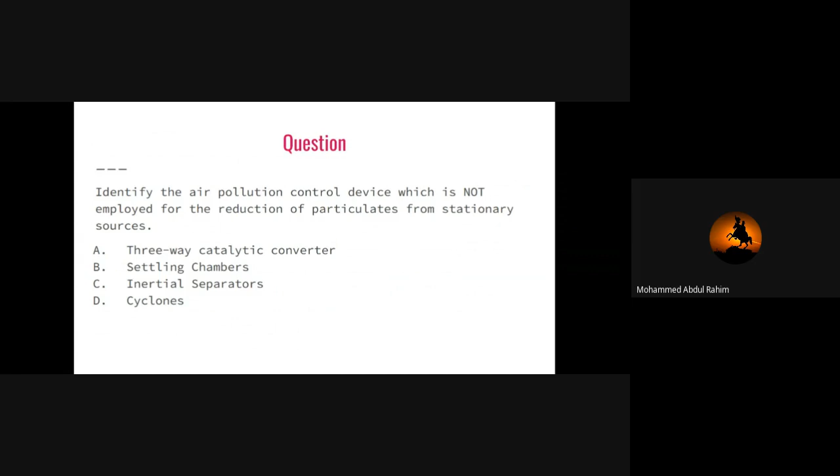Okay, actually the answer is three-way catalytic converter. We will talk about this, how this is the three-way catalytic converter. Actually, the settling chamber is a kind of chamber in which the gas with the particulate matter will come in and will go out. And while that gas will go out, it will be cleaner in nature. So this is for the reduction of particulate matter from stationary source.

Then the inertial separator. This is again like that. We have some fibers, for example, and we have some obstacle. And when the gas will come, this gas will strike the obstacle. The gas will change the direction, but the particulate matter can't. Because of that, particulate matter will settle down. Then the cyclone, we will talk about the cyclone as well. These three are the devices by which we can reduce the particulate matter from the stationary sources.

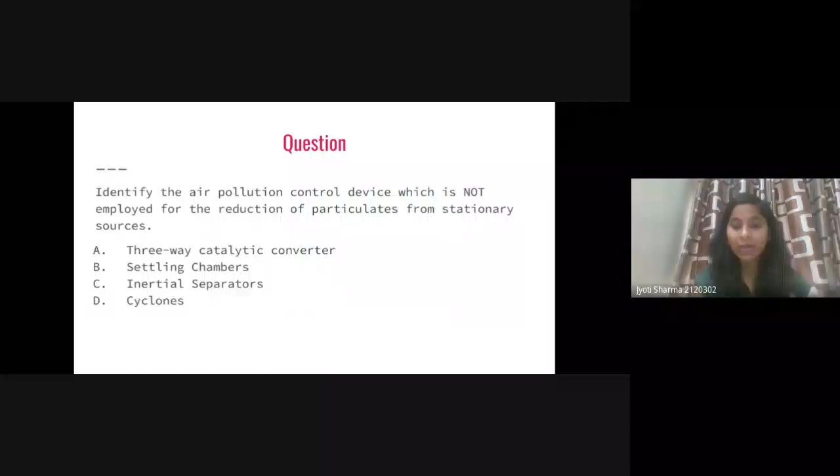Okay, so the three-way catalytic converter is not for the stationary source but for the mobile source. For example, for the vehicles, but the rest three are for the stationary source. So Nishant gave me the right answer, and this should be A.

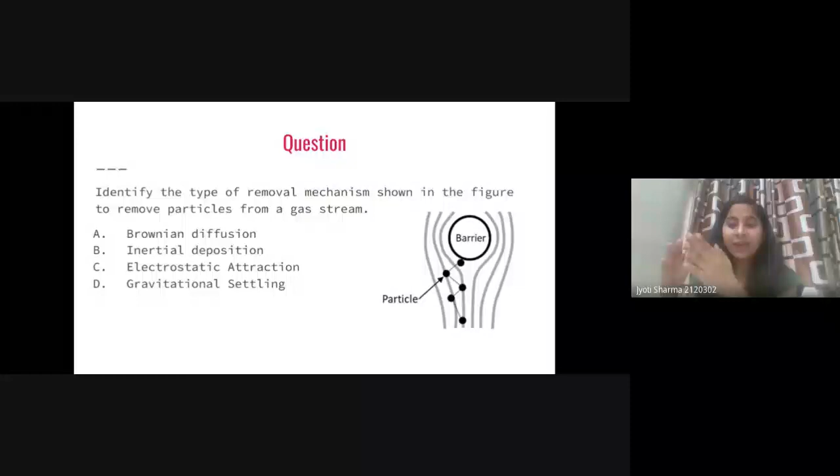The second thing is, the movement of the particle is always a zigzag movement, and this zigzag movement is nothing but Brownian diffusion. And this is also the mechanism that we exploit to control the particulate matter from our gases. So this is the Brownian diffusion.

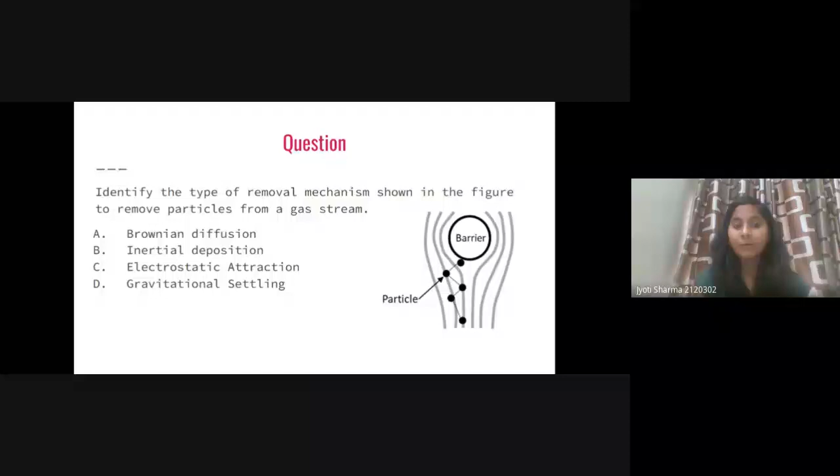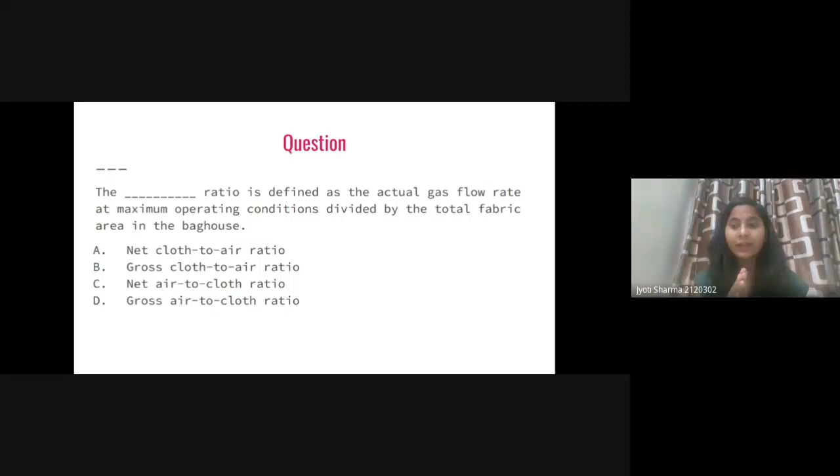So, this is the example of the fabric filter that we use to control the particulate matter. For example, you have some fabric, and this fabric is just to control the particulate matter. Whenever you have only one unit of that fabric, this will be the gross air to cloth ratio. But when you have multiple units of this fabric filter, and maybe some are in use and some are not, then this will be the net air to cloth ratio.

It is very important to calculate how much flow rate you are having and how much surface area of your cloth will be used as a filter. So of course the answer should be D only, that is gross air to cloth ratio.

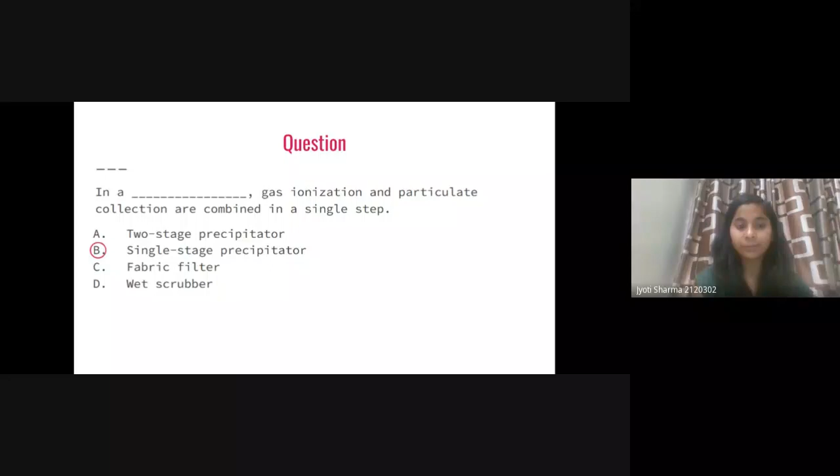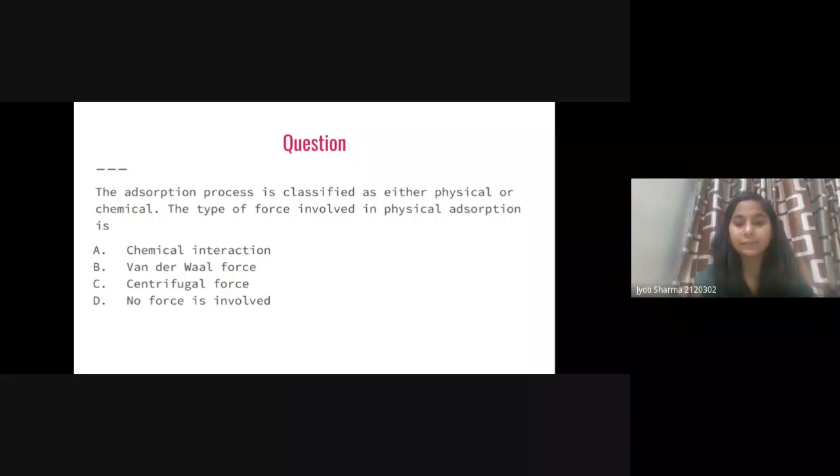But in the physical process, there is some kind of electrostatic force, and this is very mild in nature. It is very weak, and because of that electrostatic force, your particulate matter or gas can attach to the surface. The weak electrostatic force is nothing but the van der Waals force. Centrifugal force is a different thing. So for adsorption, the van der Waals force is the right answer. So answer should be B.

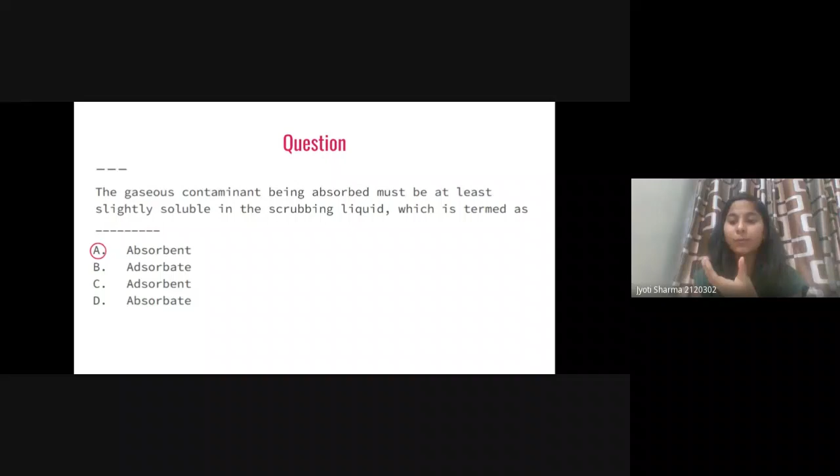Nishant gave me answer A, and Alka A maybe. Abdul also gave me A. You three people gave me answer A, and yes, it should be A only. Because we are talking about the liquid in which your air will be dissolved, this liquid is known as the absorbent, because it will absorb your gaseous contaminants. So answer should be A.

The next controlling technology is the oxidizer, and an oxidizer can be used to destroy a variety of what type of things in the effluent gas stream? Metallic compounds, organic compounds, inorganic compounds, or particulate matter.

Everyone gave me B answer, then yes, of course, it is B. And the mechanism is like that. You have the organic compound, meaning most of the time it is the hydrocarbons, hydrogen plus carbon compounds. And because we are using the oxidizer, whenever we are giving them the oxygen in the presence of some high temperature, this organic compound will be converted into carbon dioxide and water. Okay, so this is the work of the oxidizer, in which we oxidize the organic compounds. So the answer should be B only.

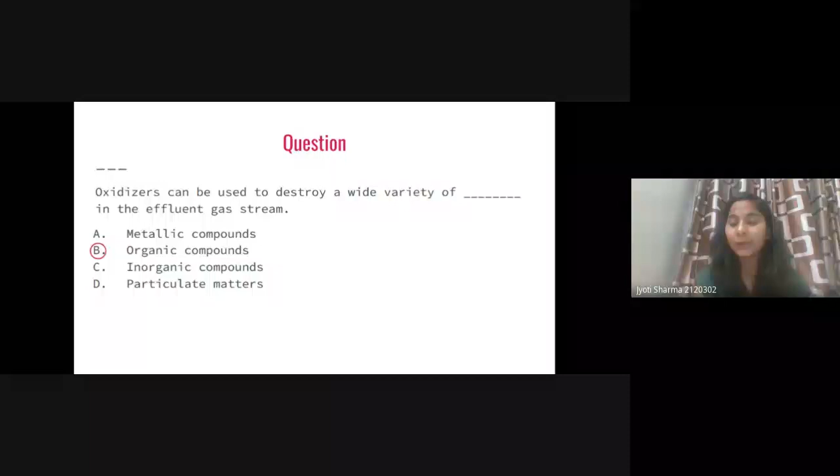Okay, I think this is the last question of the previous year. Which of the following techniques is adopted when the contaminant concentration is high enough to make a recovery feasible and economical? Biofiltration, oxidation, condensation, absorption. Nishant and Alka gave me C answer. Okay, Abdul also gave me C answer. Yes, the answer is C only, and here the mechanism is that

because your gas has some hydrocarbons or organic compounds, and it may be that those organic compounds are very valuable and maybe expensive, so you don't want to lose them. So you will reduce the temperature of that gas somehow; there may be a refrigerator system, there may be a cryogenic system. Because you reduce the temperature, the gas will not go out from the vent, and that's how you can save the organic compounds that are of interest to you and that may be expensive. This process is nothing but condensation. So the answer should be C only.

Okay, so these were the questions of the previous year, but right now we will start from scratch and try to understand each and every concept based on the MCQs. So here is the introduction to air pollution control. We know that we have some natural self-cleansing property of the atmosphere, and we exploited such self-cleansing property to develop the controlling devices. So you have to tell me what kind of mechanism we are talking about for the self-cleansing property of the environment. Options: dispersion, gravitational settling, combustion, absorption rain out, and adsorption.

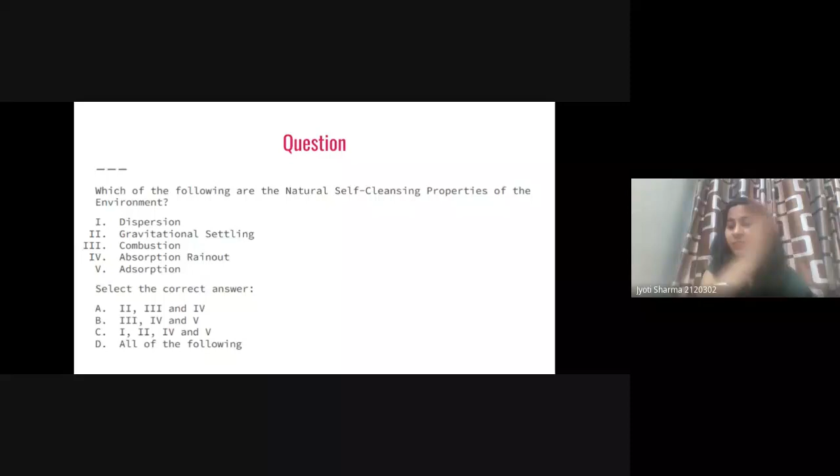Okay, so the answer should be C, because combustion is not a self-cleansing property. The environment doesn't do combustion, but except combustion, there is dispersion. For example, with a chimney, because of the atmosphere and the wind direction, the concentration will be diluted. This is dispersion, and because of that dispersion your environment will be cleaner. The second is gravitational settling. Whenever there is a storm, there is a high level of particulate matter in the atmosphere, but after some time, because of gravitational settling, that particulate matter can settle down.

Then I told you combustion is not the right answer. Then absorption rain out. Whenever you have rain, the rain will cross your atmosphere's vertical profile. In your atmosphere you have particulate matter, so this particulate matter or gas will be absorbed by the rain droplets, and because of that it will go down to the surface. So this is absorption rain out.

Then adsorption. For example, you have some aerosol, and some other chemicals can be attached to that aerosol, and because of flocculation or being heavier it can settle down. So this is adsorption. So the answer should be C. And based on these self-cleansing properties, we have some controlling devices as well. For example, for gravitational settling we have the gravitational settling chamber.

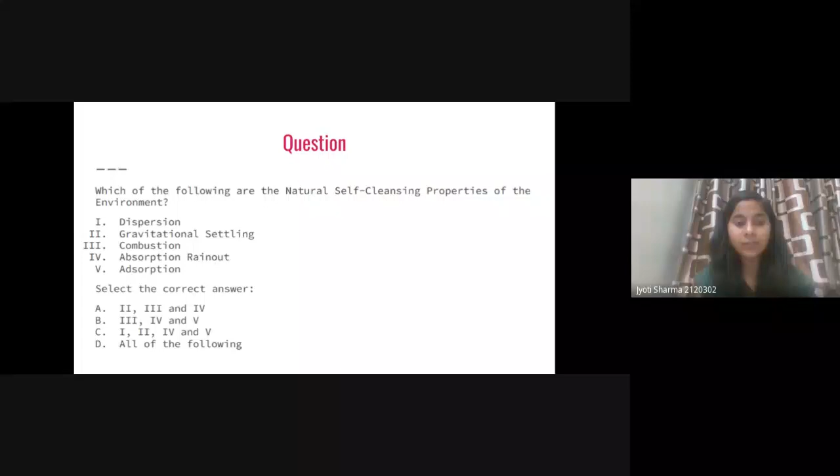There is one device. Can you give me the name of that? Settling chamber. So we use the settling chamber to copy the gravitational settling mechanism of the atmosphere. Okay, so I have a question related to each of these properties. But right now the answer is C only.

Okay, so here the question is about dispersion. You have to tell me the characteristic features of dispersion. The driving force is wind; the driving force is gravity; it is the dilution of the air pollutants; it does remove the pollutant from the environment; it does not remove the pollutant from the environment, but helps in its transportation and transformation. So you have to tell me the right statement. Take your time.

So right now we are talking about the cleansing properties, whatever mechanisms we have to clean the environment, and one of those cleansing mechanisms is dispersion. So you must know about dispersion. What do you mean by dispersion? What's the characteristic feature of dispersion? Can you guess the answer? Alka, Nishant, Abdul.

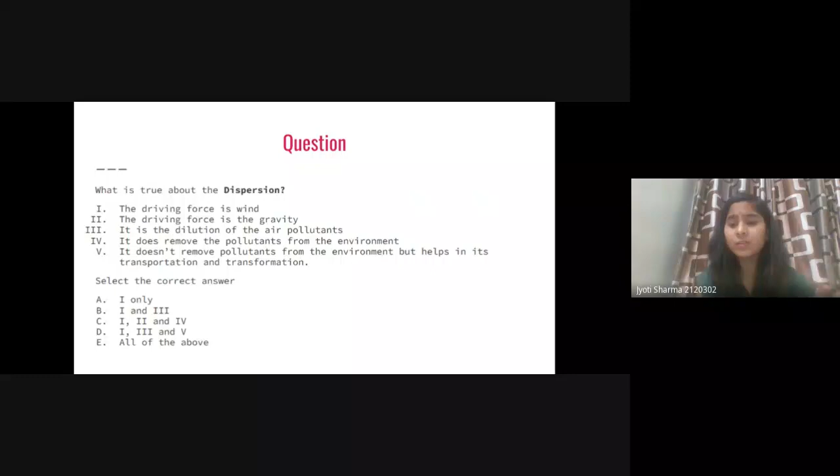But yes, the fifth option is right. It doesn't remove the pollutant from the environment, but it helps in its transportation and transformation. Because of it, your pollutant will go from point A to point B, and while going from A to B there will be transportation, no doubt, and there may be some chemical reaction with your atmosphere while it is moving. So there may be some kind of transformation itself. So the first, third, and fifth should be right, and based on that, D is the correct option. So this was all about dispersion.

And here we can see the dispersion of pollutants by wind reduces the concentration of air pollutants at the place by diluting them. And it doesn't remove the pollutant from the environment, but helps in its transportation and transformation.

Okay, the next question is about gravitational settling. This is another self-cleansing property of the atmosphere or the environment. This settling is effective for particles that are larger than what size? You have to tell me the size for which this is very effective. Alka gave me answer C. Abdul, Nishant, would you try?

A. You have to keep in mind that the larger the size of the particulate matter, the easier it is to settle down, because of gravity. Whenever the size is very small, it will be difficult for it to settle down.

No, exactly. Because we are talking about the effective, then the answer is not D, but it is C. That is 20. No doubt, the gravitation, the gravity is... Can you tell me the formula of the gravitational force? Gravitational force is dependent on the mass, and even your radius.

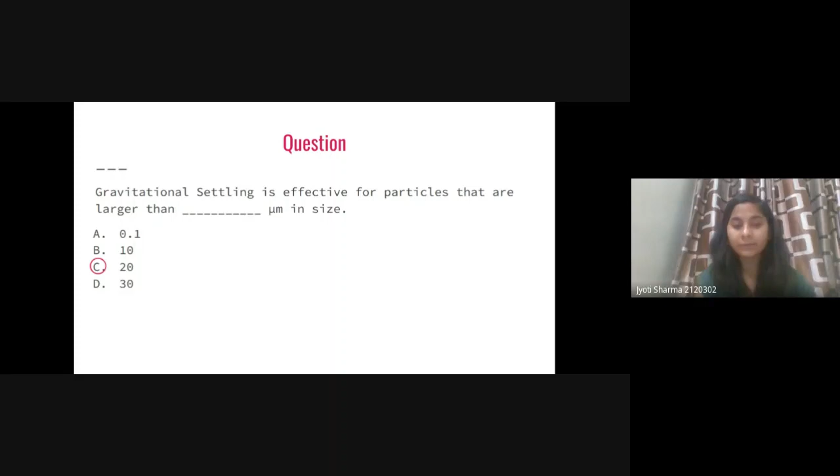Okay, so here we can see, based on that, we have the settling chamber. We exploited this self-cleansing property and we developed the settling chamber. We have the dusty air, and because of the gravity, the particulate matter will settle down and the clean air will move out of it. So this is the most important natural mechanism under which heavy particles from the ambient air settle down. Gravitational force, you know, is dependent on the mass.

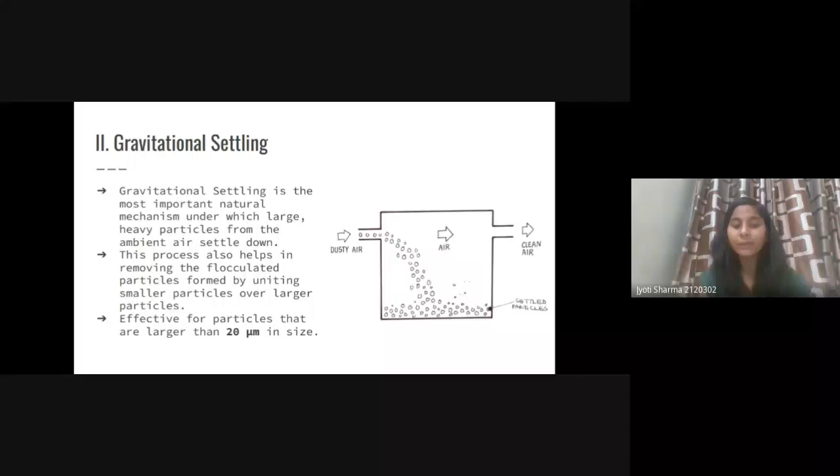Then this process also helps in removing the flocculated particles formed by uniting smaller particles over larger particles. So whenever you have smaller particles, they will conglomerate and form a bigger particle, and once it has formed into a bigger particle, it is easier to settle down, and it is effective for particles that are larger than 20 micrometer in size.

Okay, then the third cleansing property was absorption. So I have a question on absorption. You have to tell me the characteristic feature of absorption. I have three options. A: Both gases and particulate pollutants can be removed from the atmosphere. B: It removes particles smaller than 1 micrometer in size. And C: gaseous pollutants are removed in the dissolved state with moisture, either with or without chemical changes. So you have to tell me the right option.

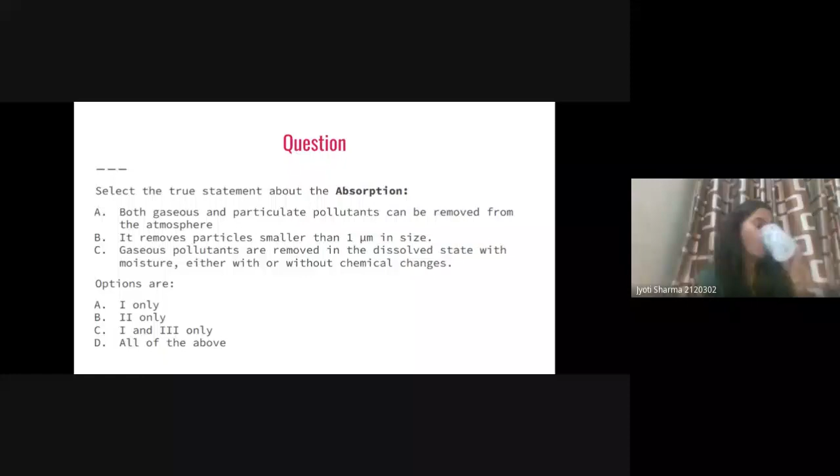Can you tell me the right statement about absorption? C. Nishant, what's your answer? What do you think? Okay, I think Alka and Abdul gave me the right answer. This is C because absorption can remove particles that are larger than 1 micrometer in size. Of course, this is the kind of thing you have to learn, it's not very technical. And this is all about absorption.

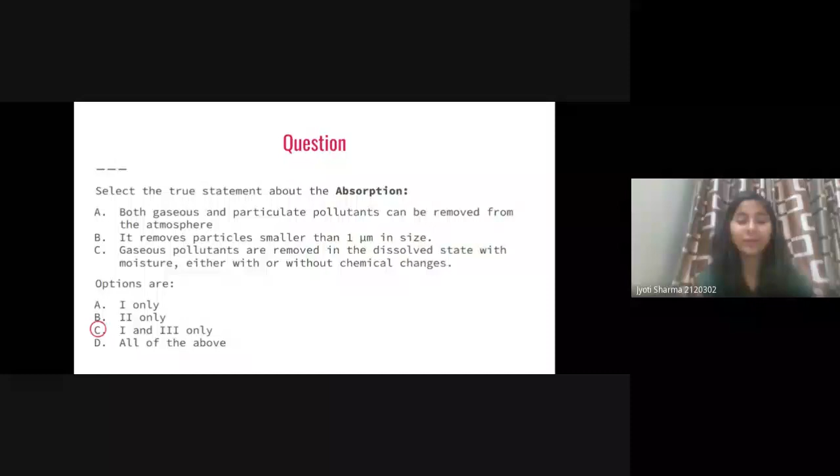So yes, with the help of absorption, we can remove not only the gaseous pollutants but also the particulate pollutants. So this mechanism is for both gaseous and particulate matter. Then it takes place below the cloud level. For example, there is a cloud, and absorption will happen below the cloud, because whenever there is rain, the rain has water, and this water will absorb some particulate matter or gaseous substances. So this will happen below the cloud level.

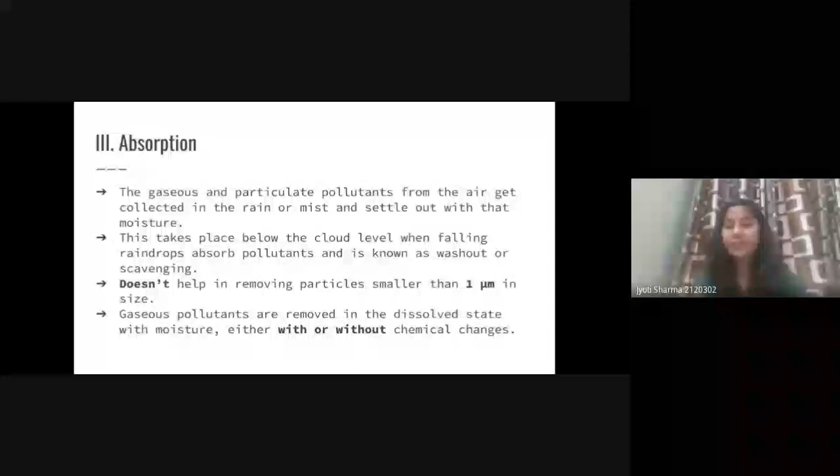Then it doesn't help in removing particles smaller than 1 micrometer in size, and gaseous pollutants are removed in the dissolved state with moisture, either with or without chemical changes. Okay, there is one question. The chemical that we use for cloud seeding, have you heard about cloud seeding? What do you mean by this?

Well, whenever there is a high level of particulate matter in the atmosphere, because the visibility is so low, or the particulate level is that high, with the help of airplanes or drones we seed some aerosol into our atmosphere. That aerosol will help in the condensation process and cloud formation. Cloud seeding is nothing but helping in artificial rain.

So whenever there is artificial rain, the particulate matter below this cloud will go down because of absorption. So you have to tell me what kind of chemical we spray so that clouds can form in the atmosphere and there may be artificial rainfall. Can you guess the chemical name? I have four options: iron iodide, silver iodide, potassium iodide, magnesium iodide.

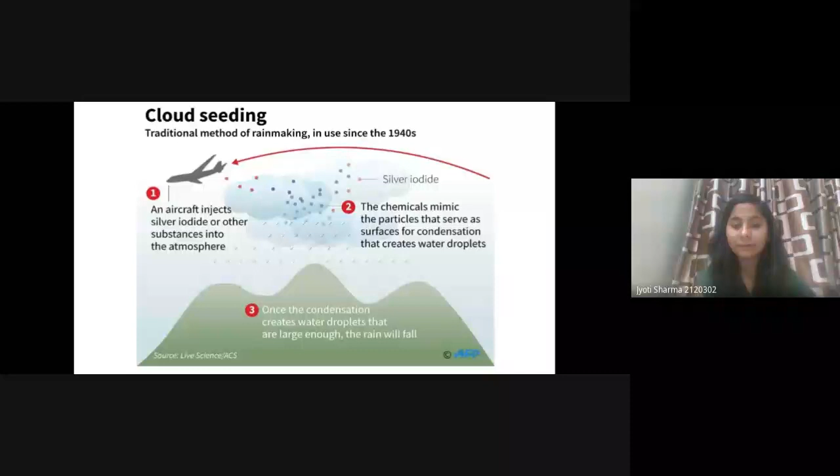And here we can see, first the aircraft injects silver iodide or another substance into the atmosphere, and these chemicals will mimic the particles that serve as the surface for condensation. That will create the water droplets, and after that condensation, there will be rainfall. This is nothing but cloud seeding, or artificial rain. This is just a second illustration of this seeding.

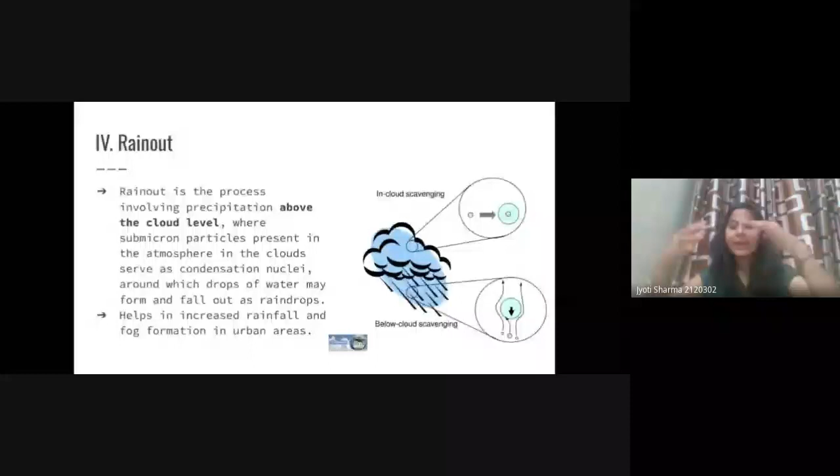Okay, the self-cleansing property of the atmosphere is rain out. We talked about absorption. In absorption, beneath the cloud you had the particulate matter. But in rain out, near your cloud there is the aerosol or the particulate matter itself, so it is not beneath the cloud. That aerosol, that particulate matter, will act as the condensation nuclei and will go down with the rainfall. And this is the rain out strategy.

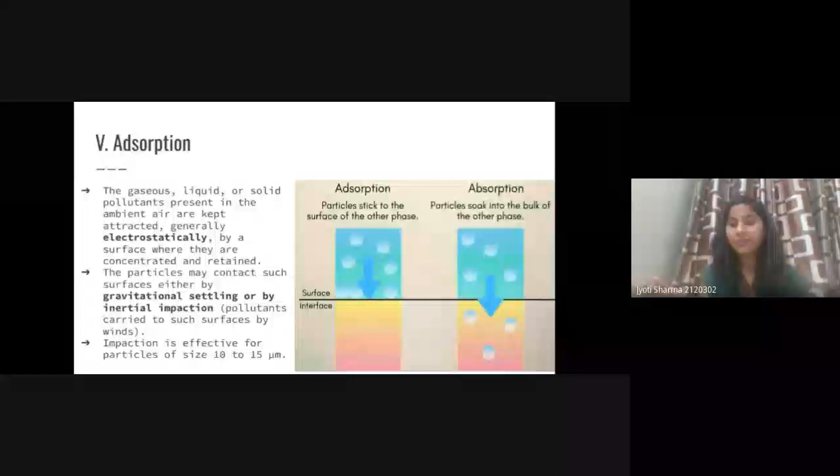Then the next is adsorption. There was some question about that also. Whenever we have some particulate matter or liquid or gaseous pollutant in the atmosphere, there is some kind of attraction, electrostatic, for example, or van der Waals force, and because of that, some substance may have this particulate matter attached to it. And this is again a self-cleansing property of the atmosphere.

So we talked about the self-cleansing properties: adsorption, absorption, rain out, gravitational settling. Based on that, we developed some controlling devices, because we built that mechanism into our devices so that we can avoid this kind of condition. So can you match the right-hand side? On one side we have the self-cleansing property, and on the other side we have the device that we developed based on it.

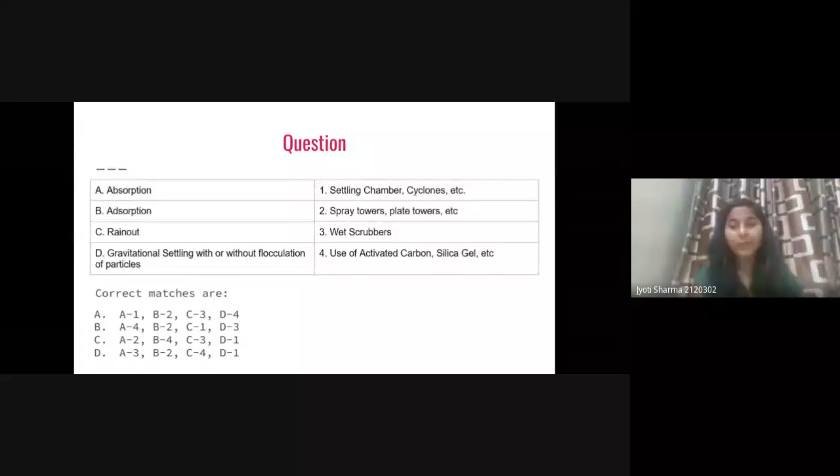Nishant gave me answer C. Okay. What do you think? C. Do you want to try? Nishant, Rashmi also gave me answer C. Okay, yes, the answer is C. Everyone gave me the right answer.

Absorption means you have some liquid, and in that liquid you will dissolve some matter. So for dissolving, there must be a liquid absorbent, and the liquid absorbent is in spray towers, and even in plate towers. If we are talking about adsorption, you have some surface on which your pollutant will be attached. So we can use activated carbon or silica gel as a surface on which our pollutant can be attached.

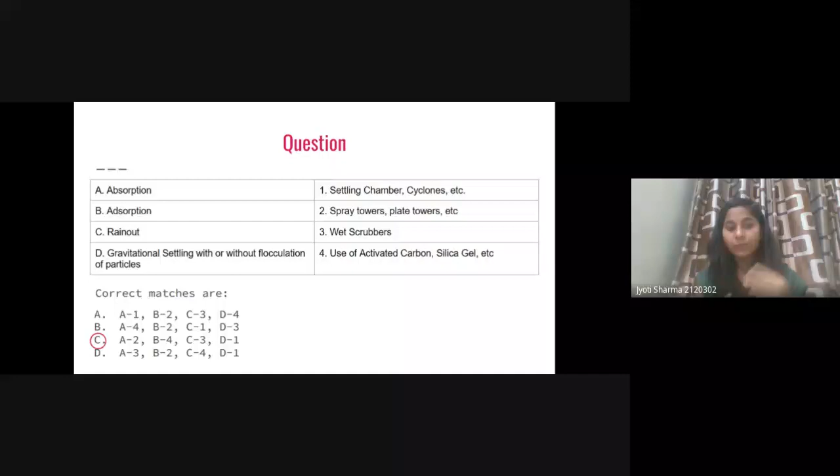Then rain out. For rain out, we have the wet scrubbers. We will talk about this. And for gravitational settling, we talked about the settling chamber, and we will talk about the cyclone as well. So these are the controlling devices that we developed based on the self-cleansing property of the atmosphere or the environment.

See, I'll give you one example. Initially, we had diesel buses in Delhi, and because of that, the SOx and NOx concentration was very high in Delhi. Removing that SOx and NOx is a different thing. But we can remove the source itself: we can remove diesel and use CNG buses, and with CNG buses, SOx and NOx are not a problem at all. So why do we need to control SOx and NOx if we can control the source itself?

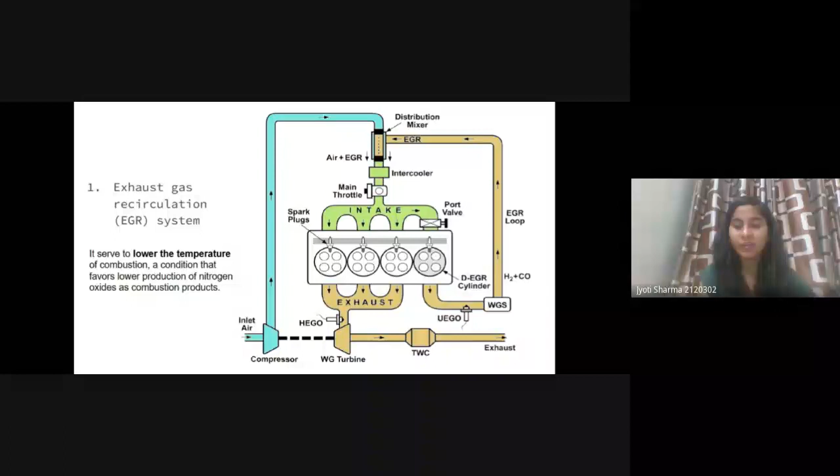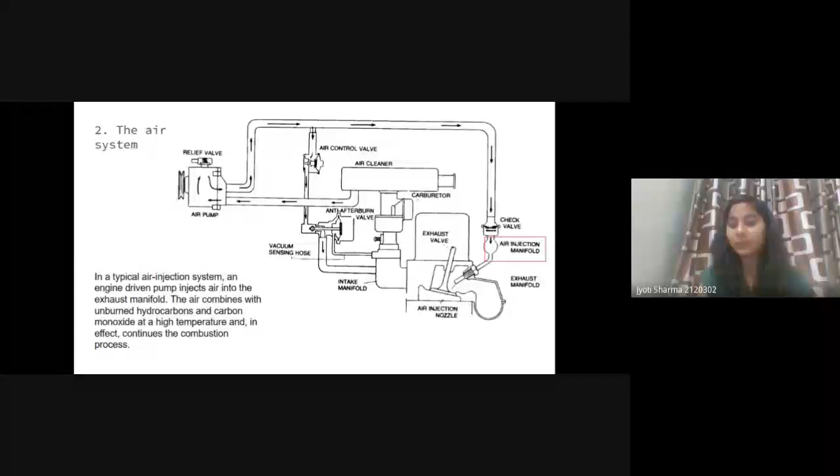The second was the air system. So in that air system, to complete the combustion, excess air is injected. Okay, so whenever there is excess air in your engine, it will lead to complete combustion. So this is the part of the air system. So the air injection manifold, that I marked in the pink box.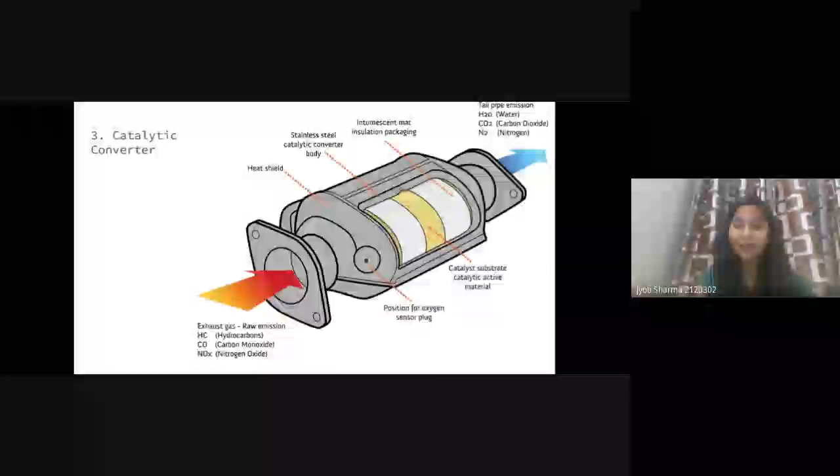Okay, the next question is: the name of the widely used catalyst in catalytic converter are. Can you give me the name of that catalyst that we use in the catalytic converter? Okay, Nishan gave me answer A. Alka, can you guess the name of the element that we use as a catalyst in the catalytic converter?

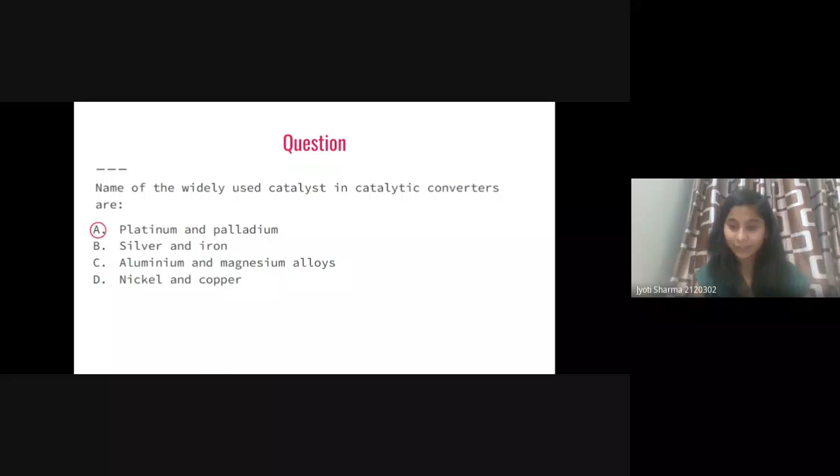Rashmi gave me answer A. Mohammed, A or C? Okay. Go with the answer that most of the students gave already. Then you will have the correct answer. Yes, it is A. That is the platinum and palladium. So we use platinum and palladium as the catalyst in the catalytic converter. We talked about catalytic converter, right?

Okay, so we have some methods. So we talked about the mobile sources and how we can reduce the emission from that. Instead of mobile sources, we have the area source. For example, from the agricultural area, we are having the pollution. So how can we reduce it? To control the dust and particulate matter from your area source, you have to maintain a soil surface cover. So you have to cover your soil so that erosion can't happen, because of erosion there may be the dust problem, right? Then the wind barriers, you can have vegetation or some artificial barrier by which you can reduce the wind at the surface, and because of that you can control the dust particles.

And in the area sources also, there is a crop residue burning problem. You people know about the stubble burning in Haryana and Punjab, and because of that, there is high air pollution in Delhi as well in the winter time. So how can we control that? We can compost the residue. We can create manure, for example. Instead of using fertilizer, we can use manure, and that manure can be produced from that residue. Then the production of biochar. This biochar is, I think, some burning material, but I don't know about this. You people can search about this.

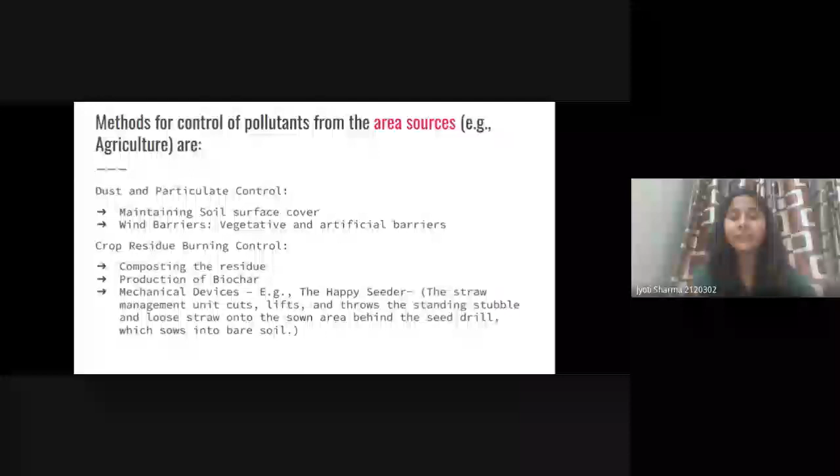And the third is mechanical devices. For example, happy seeder. I already talked about this. Happy seeder is a device by which we can extract out the stubble, and we can grow it somewhere else with the help of this happy seeder. So these are the methods that we can apply in the area sources to control the pollutant. Okay, we talked about the particulate matter right now. If we want to control the gas from the stationary and the mobile sources, then we can do absorption, adsorption, incineration, and carbon sequestration. We will talk about that.

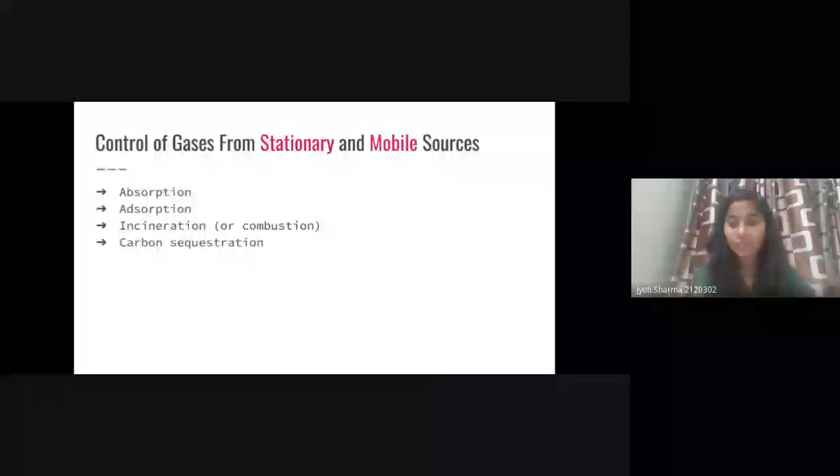Okay, the next question is: blank are usually used to control flammable or explosive dust or mist from sources. So you have to tell me the right answer for that. What kind of device do we use to control this flammable or explosive dust or mist from the source? Read the question. Yes, Nishant. You corrected yourself. Yes, so the answer should be A only.

And why A? Because whenever we are using some kind of cloth or fiber to control your particulate matter, whenever your gas has high temperature, or your gas may have corrosive property, that can give you flame in your fiber filter. So it is not good to use the fiber filter whenever you have flammable dust, because it can corrode or erode your system. The settling chamber is not for this, because uniform velocity is taken into consideration in the settling chamber, and if it is flammable and explosive, then it is very difficult to control the speed of your dust.

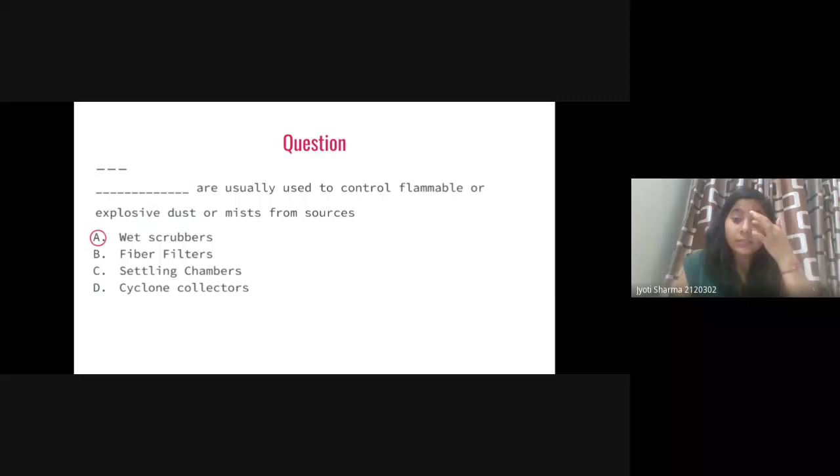Then the cyclone collector, again this is not the right answer because it will erode the cyclone collector itself. Then the wet scrubber, because we are using water in the wet scrubber, or some liquid chemicals, and because of that liquid we can control this flammable or explosive dust or mist.

Okay, so in the next exercise, we will talk about the mechanisms and the controlling devices by which we can remove the particulate matter. So based on some mechanism, we have the controlling devices. So what mechanisms do we have and what kind of controlling devices do we have? We will talk about this.

The question is tricky with the tagline "not": which is not the particulate pollutant removal mechanism. So if you want to remove the particulate pollutant, there are some mechanisms by which we can remove the particulate pollutant. You people are changing your answers very rapidly.

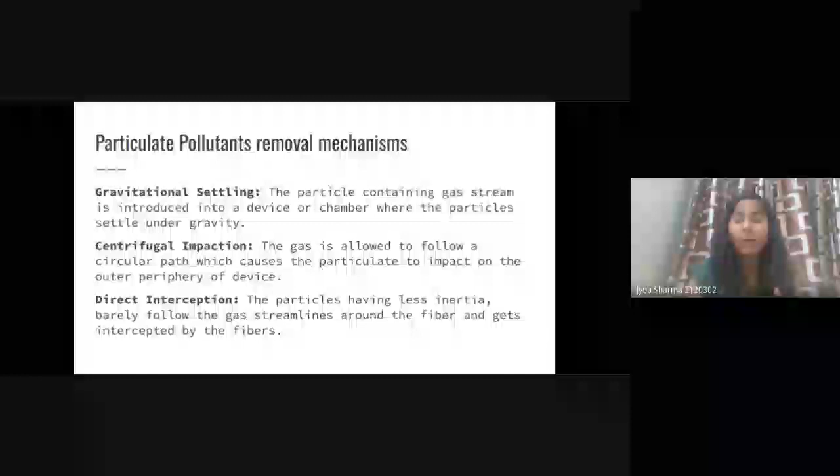What we can do is move our gas in a circular pattern. Whenever we change the direction of the gas, and the gas has particulate matter, you know that the gas can very easily change direction. It can move in a circular path, but the particulate matter in that gas will go tangentially, and this is because of inertia. The particulate matter can't move in the circular direction.

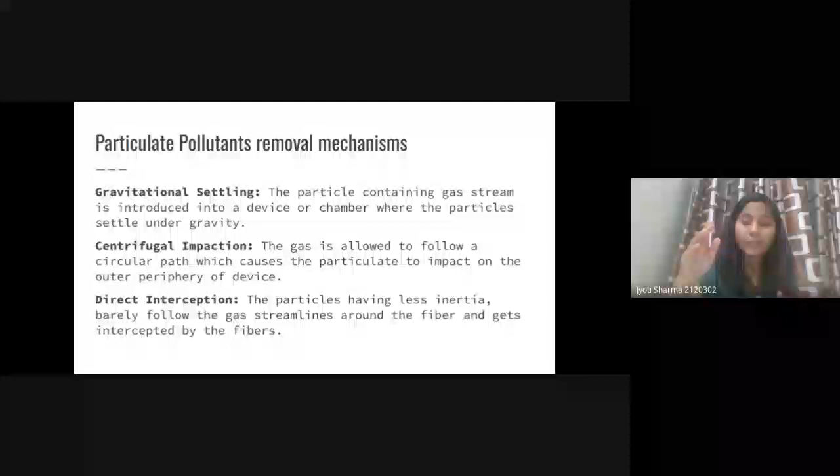So because of the centrifugal force, the particulate pollutant, and right now we are talking only about particulate pollutants, will go out tangentially from that circular motion. Okay, this is centrifugal impaction. The third is direct interception.

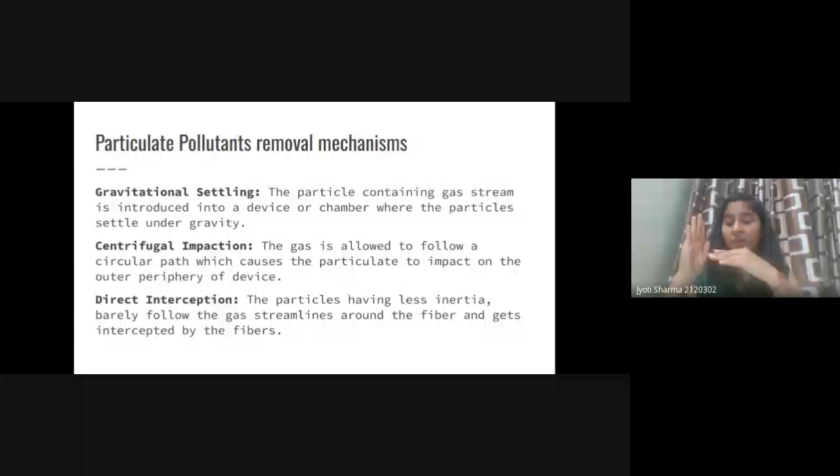For example, we have some barrier, like my hand. Whenever the wind is coming, with gas and particulate matter, the gas will go around the side of it because it can change direction very rapidly, but the particulate matter has high inertia. Because of that, it will go straight to the barrier. The gas changes direction, the particulate matter does not, and it just gets attached to the barrier. This is direct interception.

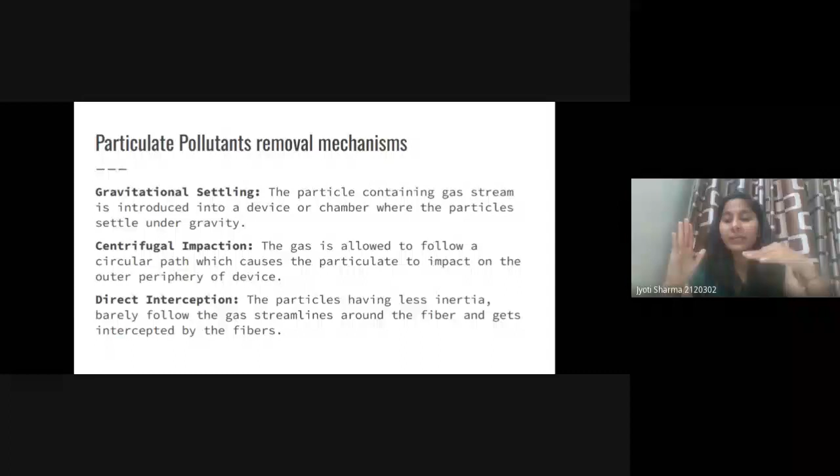And whenever we have fiber filters, like a cloth filter, when the gas interacts with it, the gas will move somewhere else, but the particulate matter will be absorbed into it because of direct interception. So we are using that mechanism to remove the particulate matter.

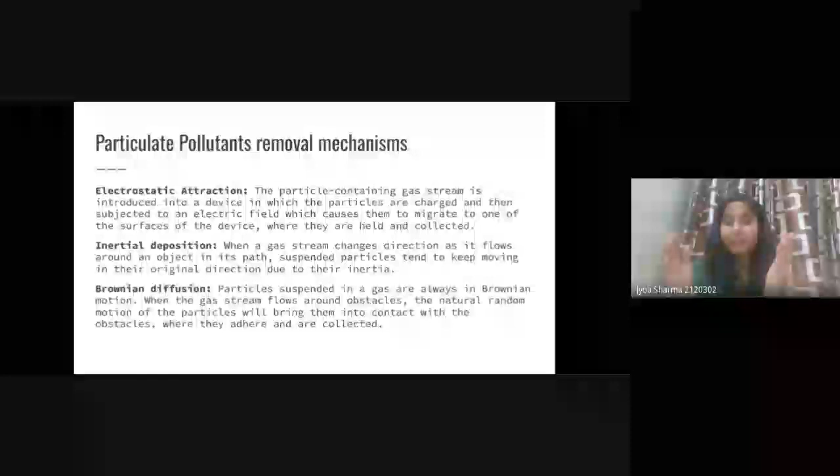Then electrostatic attraction. We can charge our particles. For example, we have a chamber with a high potential voltage. Let's say we negatively charge our particles, and we have an electrode that is positively charged. The particles are attracted and neutralized, and they settle down after getting neutralized. So this is electrostatic attraction, and we can use that.

Then inertial deposition, which is just like that. Whenever we change the direction of the gas, the particulate matter can't change direction very rapidly.

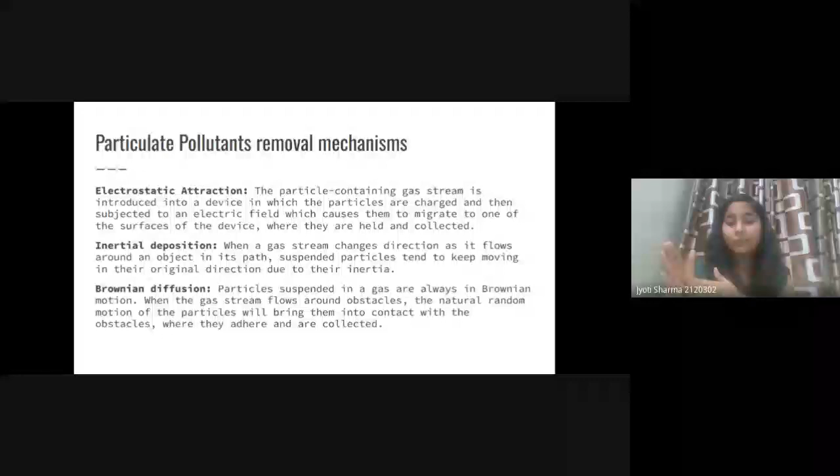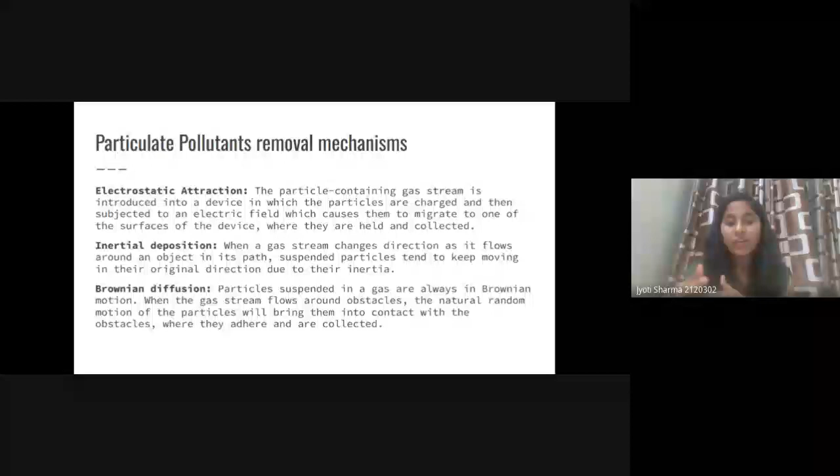It will strike your barrier, and because of that there will be the inertial deposition. Then the Brownian diffusion. You know that air can move in streamlines, but the movement of our dust or particulate matter is zigzag. And because of the zigzag, wherever there is an obstacle, it will strike the obstacle straight.

So these are the mechanisms by which we can remove our particulate matter, and that's why the answer was F. Because all of these, whether direct interception, inertial, Brownian diffusion, or electrostatic attraction, are mechanisms that we use to control particulate pollutants.

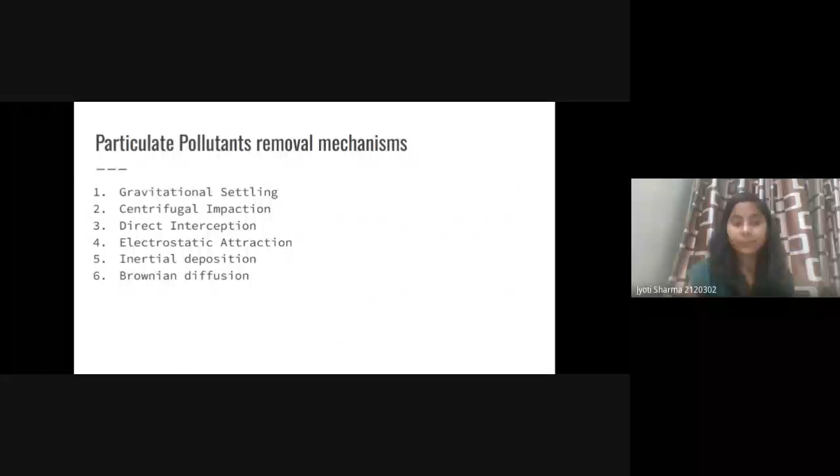Okay, the next question is: select the device used to control the particulate matter at the stationary source. So we talked about the mechanism. Based on that mechanism, we devise some devices. So you have to tell me the device name that we use to control particulate matter at the stationary source.

Rashmi and Alka gave me answer C. Yes, I want to ask Alka and Rashmi, why not B? Can we use the scrubbers? So the answer is B. This is scrubbers, and packed towers are mostly used for gaseous pollutants. And because we are talking about particulate matter, this is the scrubber.

So this is the list of devices that we use to control particulate matter from the stationary source. We use the settling chamber, based on gravitational settling. We use the inertial separator, based on inertial deposition. We use cyclones, based on centrifugal force. As we talked about, we use scrubbers, based on absorption and adsorption.

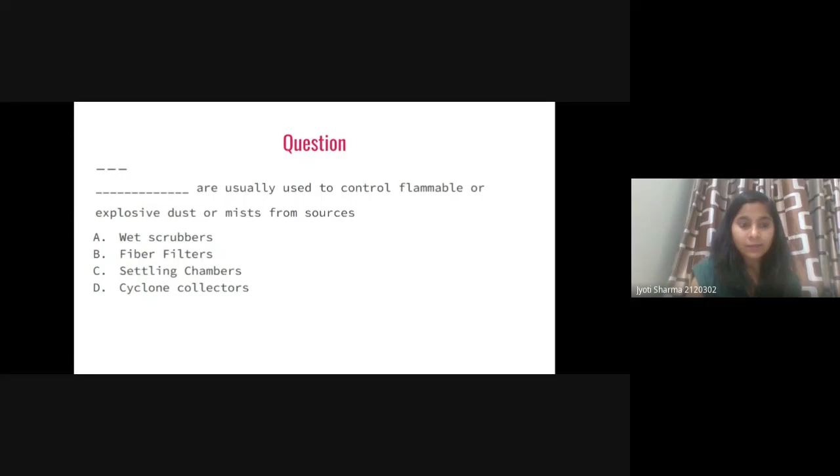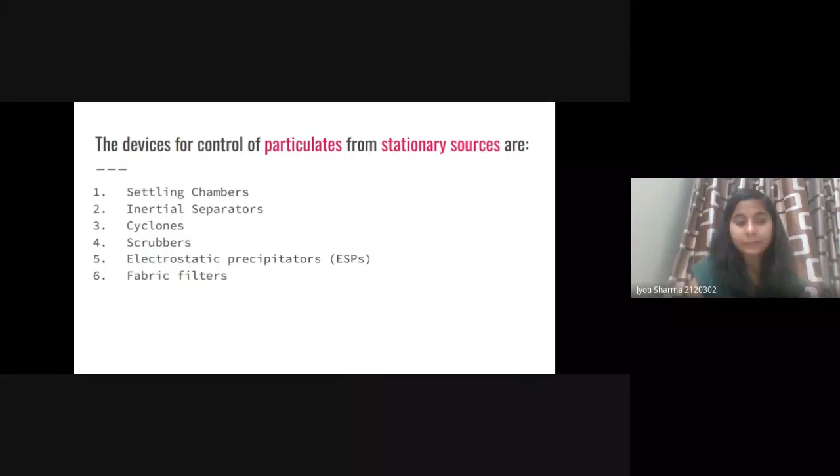Ma'am, but both packed towers and scrubbers are for stationary sources. Let me see if I have missed something. Packed towers, we will talk about this, Alka, in the next slide: how packed towers are not for particulate matter but for gaseous pollutants. Oh, I gave you the answer already. So can you tell me the true answer about this settling chamber?

Okay, and we have to minimize turbulence and ensure uniform velocity, so for that we can insert some curtains, rods, or wire mesh screens to ensure uniform velocity. Then efficiency is improved if the height to be traveled by the particle is less. So right now we have the height h. So whenever the height that has to be traveled by the particulate matter is less, efficiency will be greater.

And to reduce the height to be traveled, we use some trays or shelves, and we incorporate them into the chamber. And the increase in efficiency obtained by the insertion of these trays, we talked about this, is directly proportional to the number of trays we are inserting, so that we can reduce the height to be traveled by the particles. And here the minimum particle size that can be removed after installation of trays is about 10 micrometer, but this is after the installation of trays.

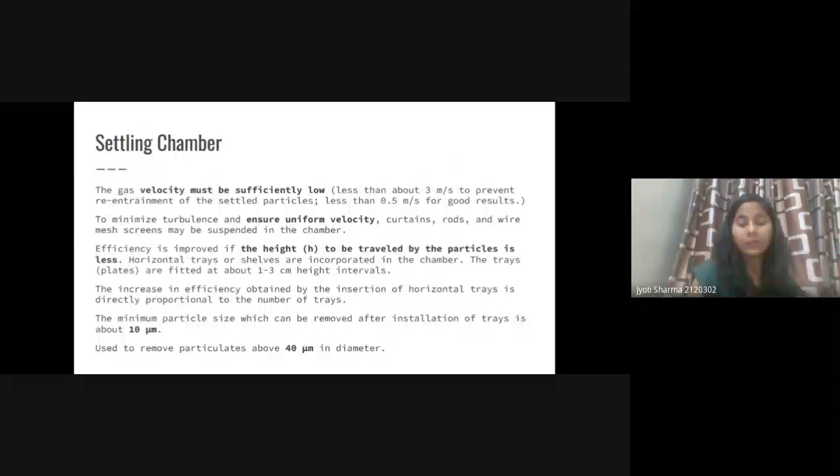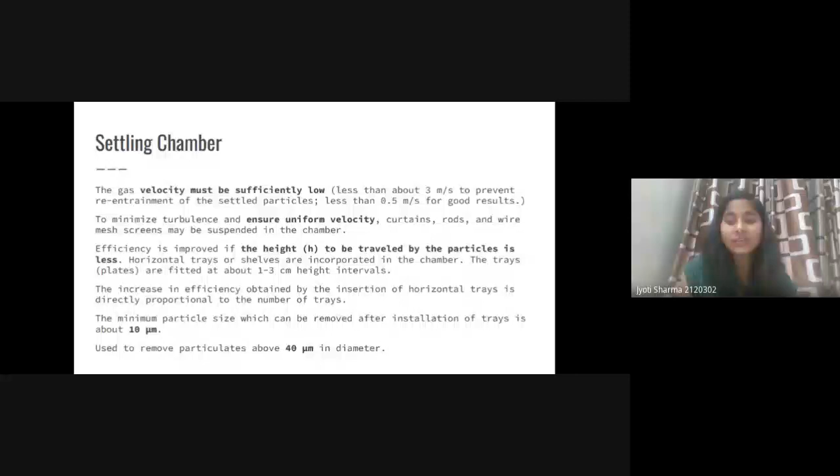And if we are not installing the trays, then it can be used to remove particulates above 40 micrometer in diameter. You can see that in the criteria pollutants, we talk about 2.5 and 10 micrometer diameter. Okay, and this settling chamber can only remove the particulates that are above 40 micrometer. And above 40 micrometer, these are not that much harmful to us. So we are using this settling chamber just as a pre-device before using the high efficiency devices. Okay, we will talk about this as well. So this is all about the settling chamber.

The second device to control the particulate matter was the inertial separator. So can you tell me the right statement about the inertial separator? So I have four options. Utilize the relatively greater inertia of the dispersoid. Utilize the relatively low inertia of the dispersoid. There is a continuous change of direction of the carrier gas stream. There is no continuous change of the direction of the carrier gas stream. So can you tell me the right answer?

So this is based on the inertia. As I already told you, whenever in the gas you have the particulate matter, your particulate matter has some inertia, and because of that inertia, it will not go in a different direction. It will directly strike your barrier. So based on that mechanism, we are using the inertial separators.

Rashmi gave me answer B, that is second and fourth. Alka A. Alka, you are sure? Oh my God. Alka, you are studying very hard. I think you are giving me the sure answers.

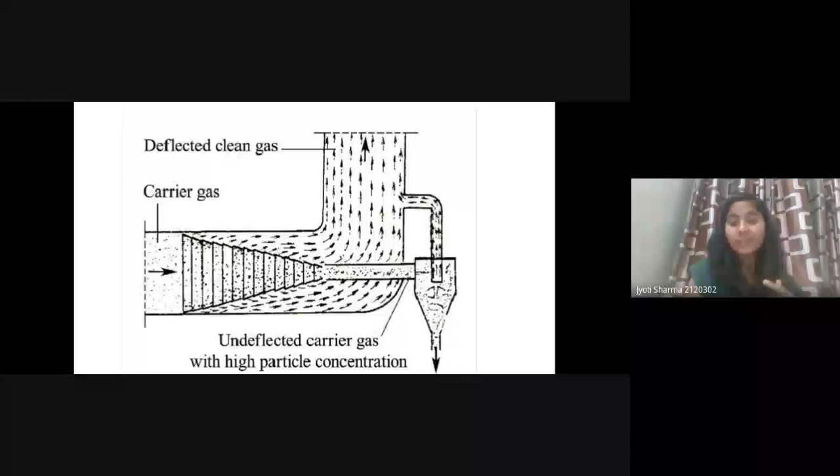Yeah, here we can see that there is some carrier gas, and we have some construction in such a way that we are changing the direction of our gases. Okay, so whenever we change the direction of the gases, particulate matter will go down, and because we are changing the direction, the deflected clean air will go out of it. Okay, so this is the principle that we use in the inertial separator. And we have different types of separators.

Okay, and then how many number of baffles you are using, what is the spacing of that, the configuration, based on that your efficiency will be dependent. This method is suitable for removing particles larger than 20 micrometer in diameter.

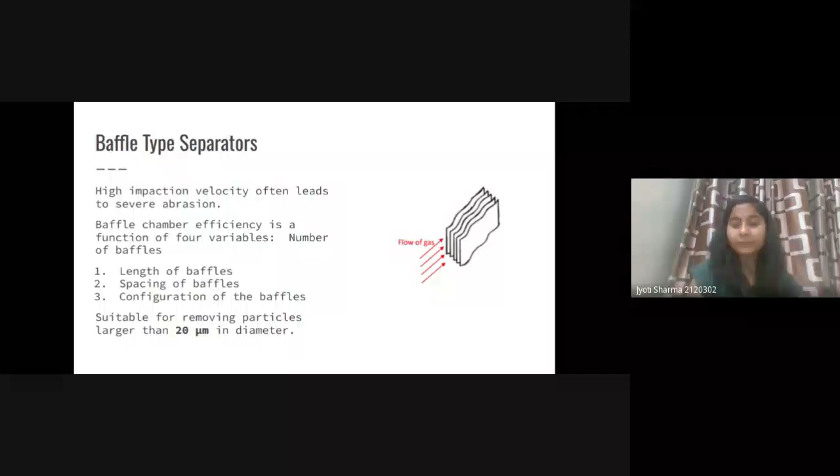Then another, we have the louvre type separator. This is the second type of separator, in which we have baffles in such a way that it can reverse the direction of your air. Okay, so whenever there is a change in the direction of the air, the particulate matter will be collected out, and here it is suitable for the particles that are larger in size, that is larger than 30 micrometer in diameter.

We have third type, that is the dust trap, in which we change the air direction by 180 degrees, and because of that we can control our particulate matter that has the size greater than 30 micrometers. So we are exploiting the inertia of the particulate matter in that device to control the particulate matter, right?

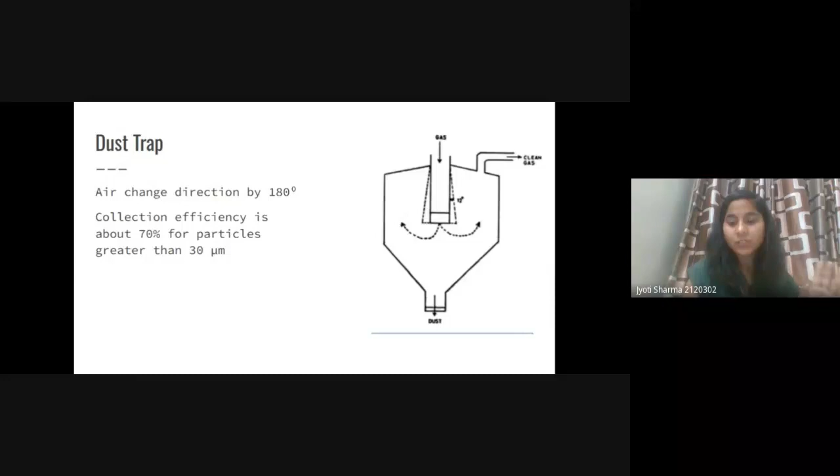Okay, the next question is based on the cyclonic separator. So this is the next device that we use. So can you tell me what force acts on the particulate matter in the cyclonic separator? Question was this one. You already gave me the answer, Alka. We were just talking about different types of separators we use. Okay, the next question is which force acts on the particulate matter in cyclonic separator?

Rashmi gave me answer A. Nishant C. Okay, Rashmi, you are confusing. Are you confusing centripetal and centrifugal force? Okay. What do you mean by centripetal? Something that will come inside, to your center. Centrifugal, that force that will lead something to go out of that circle. So there are two different things, centripetal and centrifugal. Yes, it is C answer.

This is the centrifugal force. As I told you, when gases are moving in the circular motion, there are two types of forces that are balancing. The inner force, that is the centripetal, and the outer force, that is the centrifugal. Okay, and because of that inertia, your particulate matter will go out tangentially, and this is because of the centrifugal force, right? So here is the mechanism. So answer C is right.

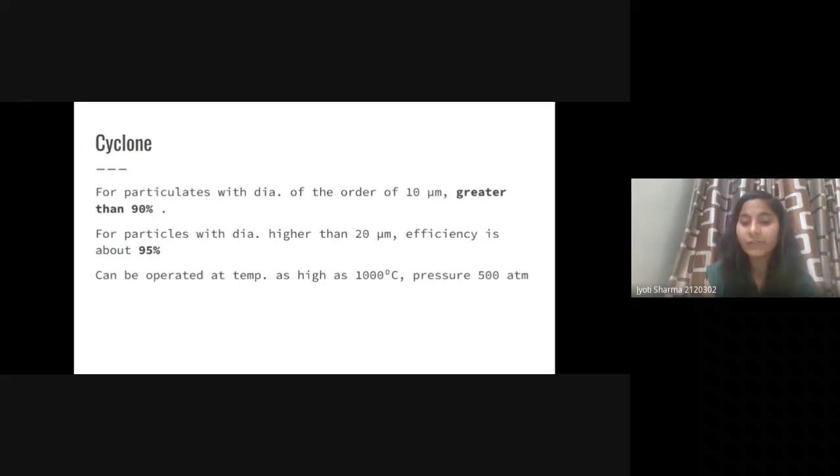Okay, and the efficiency can be increased or decreased based on some characteristic features of the dust itself, and even the separator dimension. For example, efficiency will increase if there is an increase in the dust particle size. We already know about this. Dust particle density: if the density is higher, then yes, settling will be more. Gas inlet velocity: if it is a higher velocity, then this cyclone can collect this particulate matter fast and in a very efficient manner.

Then the cyclone body length, then the ratio of body diameter to gas outlet tube diameter. But the efficiency will reduce if there is an increase in gas viscosity or density, cyclone diameter, gas outlet diameter, and inlet width, inlet area.

Okay, the next question is about the cyclone separator, and you have to tell me what kind of problem we face when we are using these cyclone separators. So you people know that each device has some advantages and disadvantages. So the cyclone separator has some kind of disadvantage itself. So what kind of disadvantage are we talking about? What will it create, what kind of problems may we face whenever we are using the cyclonic separator to control the particulate matter?

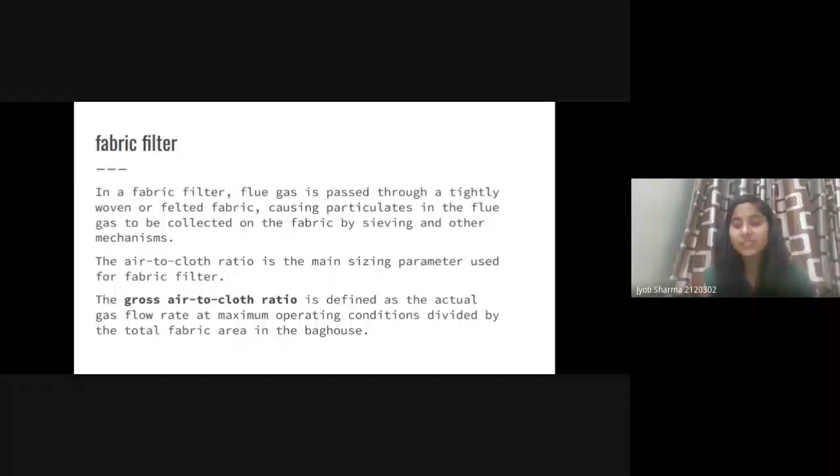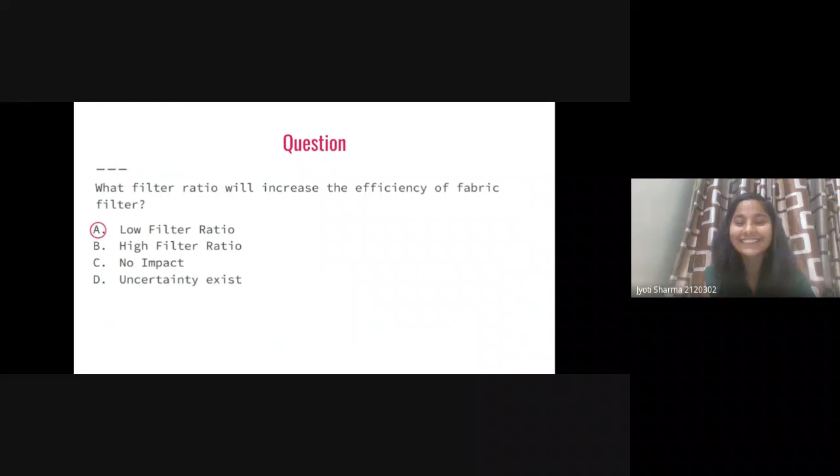The answer is A, that is low filter ratio. Filter ratio is defined as the ratio of the carrier gas volume to the gross filter area per unit flow of the gas. So your volume of carrier gas should be low in comparison to the filter area. That's why a low filter ratio will give you efficiency. Excessive filter ratio lowers particulate removal efficiency and results in increased bag wear. Therefore, low filter ratios are recommended for high concentrations of particulates. So now you know what is meant by the filter ratio.

Okay, as I told you, the efficiency is 99%, but we have some disadvantages as well. These disadvantages are because we are using fabric, and this fabric may or may not be acid resistant, may or may not be base resistant, because gas can be acidic in nature, basic in nature, or have high velocity. So the fabric must be acid resistant and alkali resistant, the tensile strength should be high, and there should not be abrasion from the gas striking the fabric at velocity every time.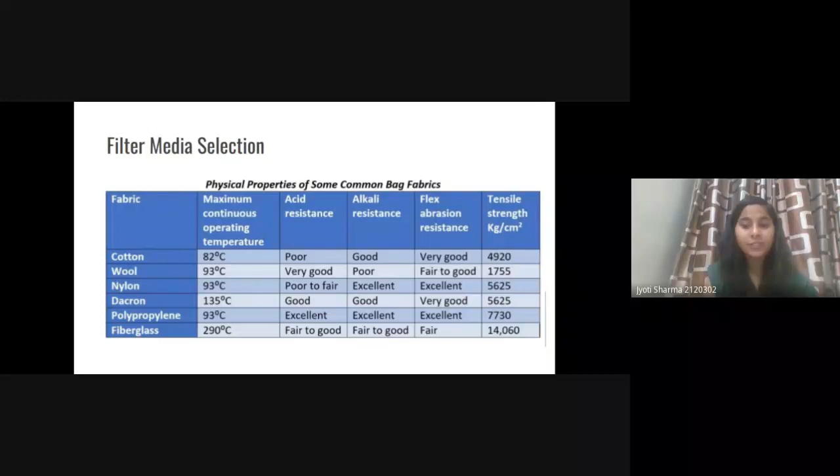So we have different values for different fabrics, and based on our need, for example, if the pollutant that is being released from your industry is very acidic in nature, then it is better to use polypropylene. But if the temperature of your gas is very high, then it may be better to use fiberglass. So based on the physical properties of the fabric, you can decide what kind of fabric you need in your bag house.

So the next question is based on another device, and you have to tell me the device. In which device is the gas stream passed between two electrodes across which a high potential difference is maintained? What kind of device am I talking about?

Ah, Rashmi is so quick to give me the answer. B. Okay. Abdul also gave me answer B. Alka, what do you think? What should be the answer? Nishant? Okay, so everyone gave me answer B.

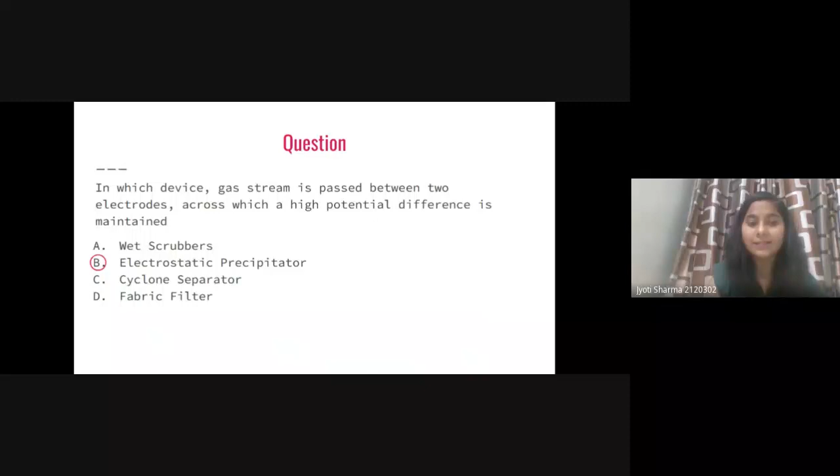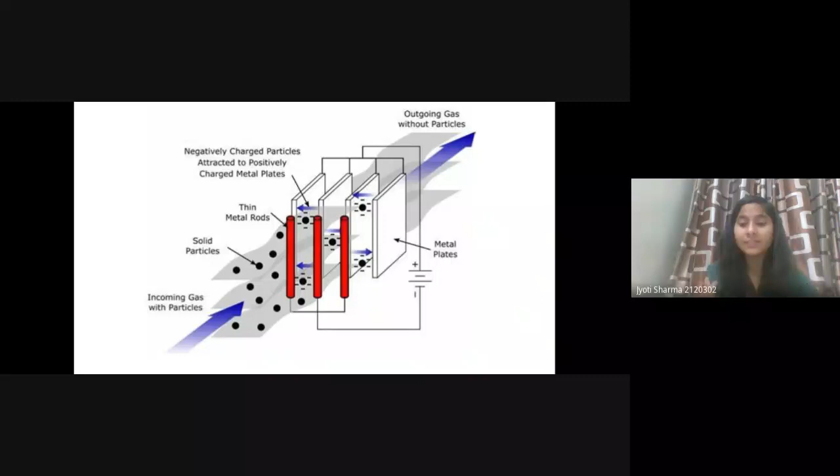So yes, the answer is B, the electrostatic precipitator. Here you can see we have some plates, and these plates are connected to the voltage potential, so they will have some charge. Whenever gas comes to the plate, the gas will contain negative charge, and because your plate has positive charge, it will be attracted to the positively charged metal plate, and because of neutralization, your particulate matter will be collected. So this is the mechanism of the electrostatic precipitator.

We have such precipitators in reality, and at the end there is the collecting plate. So the working of the ESP, the electrostatic precipitator: the gas stream is passed between two electrodes which have a high potential difference, one is the discharging electrode and the second is the collecting electrode. One may have positive charge and the other negative charge.

Because of the high potential difference and discharge system, a powerful ionizing field is formed. Because of that ionization, the particulate matter will also acquire charge, and it will migrate to the positively charged collecting electrode, get deposited and lose its charge. This is how we collect the particulate matter, and here the efficiency is greater than 99%. This is a very good and very sensitive device.

Then, the control device that can be used to collect both particles and gas is? Up to now we talked about particulate matter, and all these devices were focused on particulate matter only. But there is one device that can be used to control both particles and gaseous pollutants.

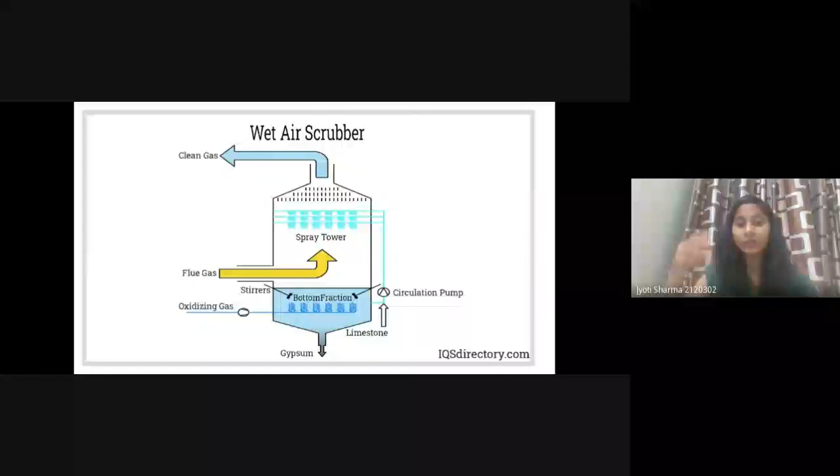Now we are spraying some kind of chemical or liquid chemical. Whenever there is a charge on that liquid chemical or the liquid spray, that charge can give you different kinds of controlling characteristics. So this is electroscavenging, when your liquid droplet has some charge.

Then phoresis is nothing but whenever we are increasing or decreasing the temperature of a droplet. Whenever we are doing this, there may be some condensation. Because of that, there may be some kind of gradient, and because of that gradient, absorption or collection of the particulate matter as well as the gases can happen. So this is phoresis.

And we have different types of wet scrubbers. For example, spray tower, venturi scrubber, cyclone scrubber, packed scrubber, and the mechanical scrubber. And Alka, yes, we do have the packed or venturi scrubber, and both can be used for both particulate matter and gaseous things.

Okay, so up to now we just talked about particulate matter because this was important, and now we will talk about the different mechanisms and, based on the mechanism, what different types of control devices we have to control gases. For example, if we have carbon monoxide, ammonia, or hydrocarbons emitting from industries, how can we control that, what kind of devices we have, and what kind of mechanism we can exploit.

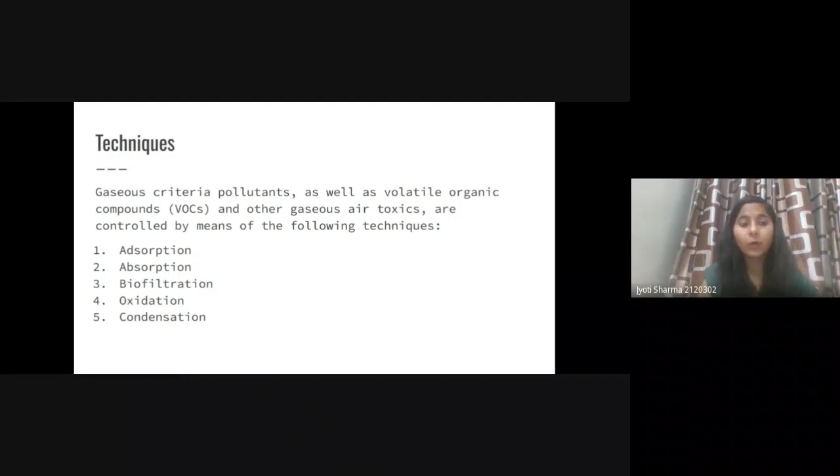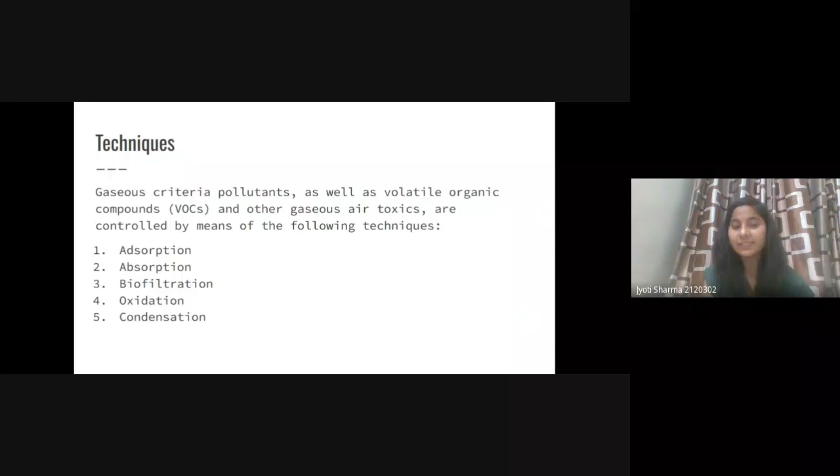So the techniques we have: we can do adsorption, absorption, we can use biofiltration, oxidation, and condensation. So these are the techniques we can exploit to control our gaseous pollutants. So these are the mechanisms.

Nishant, did you change your answer? Okay.

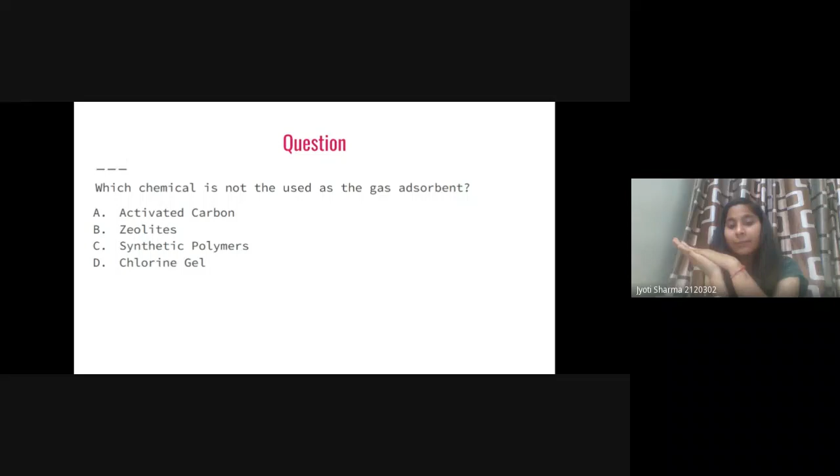Here, can you guess which chemical is not used as a gas adsorbent? As I told you, we have some surface, and on that surface, gas will be attached. If it is attached on the surface only, it is not absorbed, and this is adsorption. And we have some chemicals by which we can adsorb the gas on the surface. So you have to tell me which chemical we are not using as a gas adsorbent.

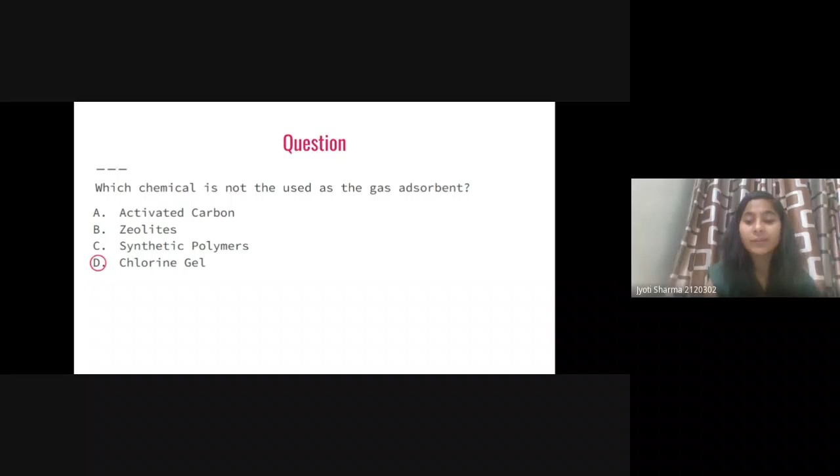Yes, the answer is chlorine gel, because there is no chlorine gel. It should be silica gel, because we use silica gel for gas adsorption. Okay, so the type of adsorbent we had is activated carbon. Here the surface area is very important, because only on that surface will the gas be attached. So whenever there is a high surface area, there will be higher adsorption efficiency, right?

Okay, the mechanism of absorption is governed by which law?

Yes, Rashmi, you can leave. Thank you so much.

So we talked about adsorption, but this is absorption. So absorption is governed by which law?

There is a difference between adsorption and absorption. As I told you, for the adsorption, there is some surface. That surface is solid in nature, and on that surface, the gaseous pollutant will be attached. So that is the adsorption.

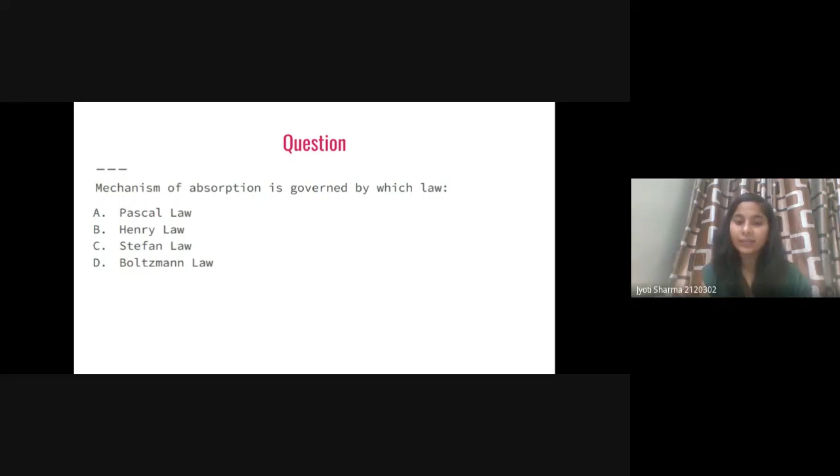Yes, this is Henry law. So Henry law is nothing but the concentration of your gaseous particle that will be absorbed in the liquid; the partial pressure of your gas is directly proportional to the concentration in your liquid. And whenever we are equating it, then there is a Henry constant. So you people can read about this. But right now, if there is a liquid and the gas, and there is absorption, then the law is Henry law.

Okay, the process of collection of the contaminants on the surface of a medium that contains viable microorganisms is known as? So this is a different mechanism. No, no, Nishant, this is not bioscavenging. So instead of activated carbon, we use the surface of the microorganism so that the microorganism can take your gaseous pollutant and, based on the metabolism, that gaseous pollutant can be converted into simpler gases.

So we have some microorganisms that will take, for example, carbon monoxide, hydrocarbons, because these hydrocarbons can be the food for the microorganism, and this microorganism, with the metabolism, with the digestion, will give you water and carbon dioxide only. Okay, let me see who gave me what. Nishant changed to A now. Mohammed is still at B, and Alka gave me answer A. This technology is biofiltration. Yes, so the answer should be A. This is biofiltration.

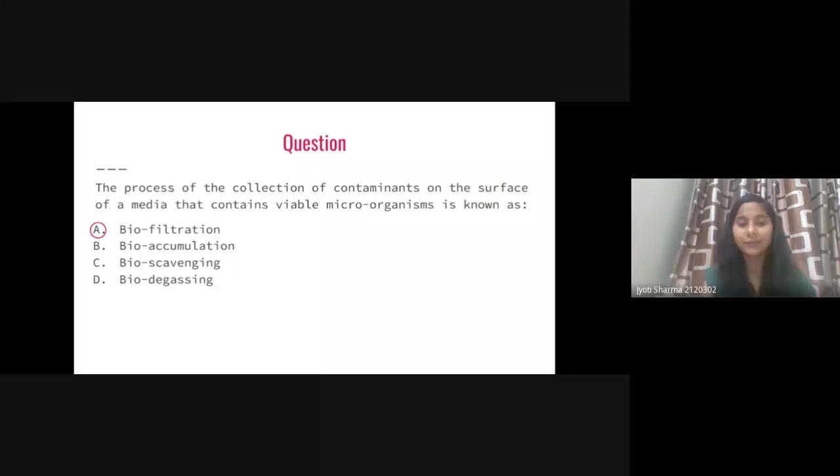Okay, so I think I have one or two more questions. This is a different technology that we use to control gas compounds. Here, for example, we have hydrocarbons. This hydrocarbon will be destroyed, and this mechanism destroys organic compounds in the effluent gas stream. Therefore, they are used when the economic recovery of the compound is impractical. Can you give me the answer for that? You can cancel out the devices that we already have talked about.

Okay, Alka gave me answer A. Abdul is also saying A, I guess. Okay, your guess may be correct. So the answer is A, that is the oxidation system. So we are providing the oxygen. For example, if we have some organic compound, meaning mostly hydrocarbon compounds, and we give oxygen to the hydrocarbon, then this will be converted into water and carbon dioxide.

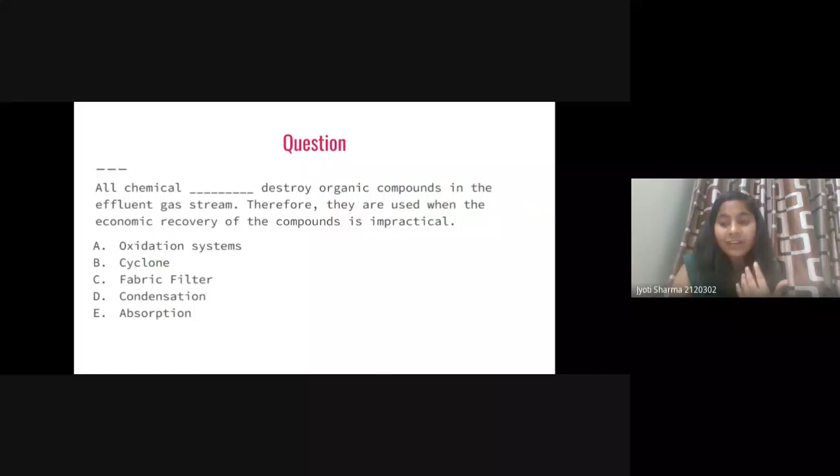But we have to keep in mind that some of the organic compounds may be important for us. It may be expensive, so whether we can recover it or not. If we can recover it, then the oxidation system is not good because it is just destroying your organic compound. If you want to recover it, then we have a different mechanism for that. So the oxidation system is a system by which we can destroy the organic compounds in the gas. So A is the right answer.

Okay, so here you can guess. In that mechanism, we recover the organic compounds present at moderate to high concentration in industrial process effluent gas streams. So if you have hydrocarbon in your gas, you can recover it by some method, by which you can also avoid the release of that hydrocarbon into the atmosphere. So what is the technology we are talking about? Can you guess? In previous year's assignment there was this kind of question, and Alka, you gave me the right answer for that. Now you gave me B.

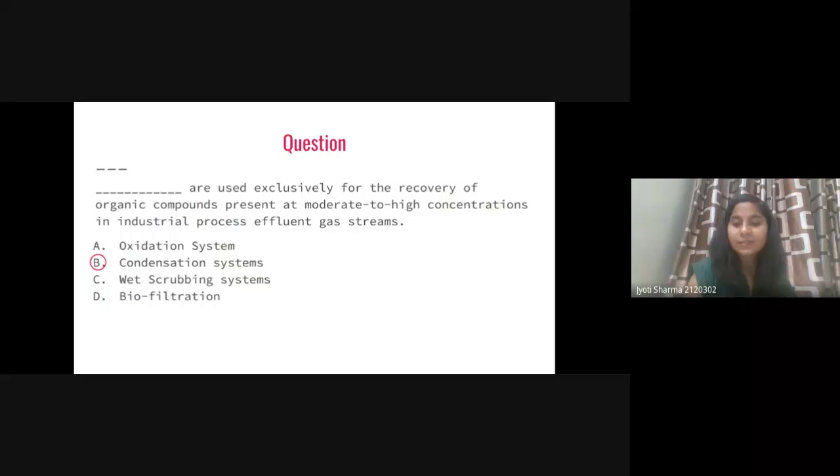Condensation system. Yes. So whenever the gas that has the hydrocarbon is releasing, we will reduce the temperature of the tube from which the gas having the hydrocarbon is releasing. After reducing the temperature, condensation will happen, and because of that condensation, your hydrocarbon will be collected as it is inside your industry itself. Yes, Nishant, this is B, the condensation system. So that was all about the different mechanisms and devices we use for controlling air pollution.